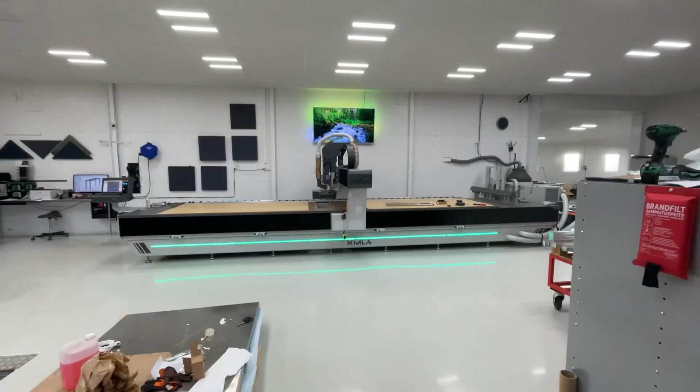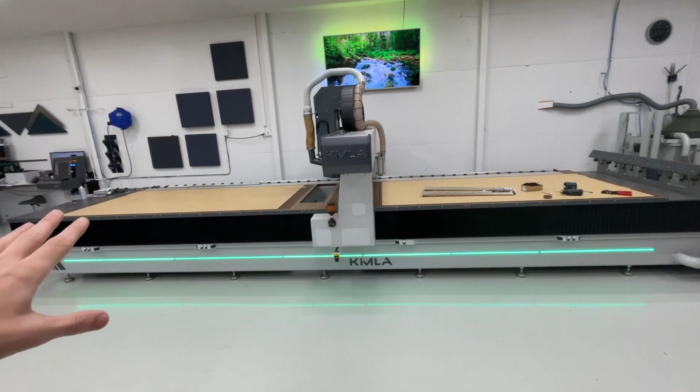Anywho, so it's Saturday, it's my birthday, we're gonna be routing like it's my birthday, because we're gonna produce 260 parts, and I think I can get around 100 from each sheet. I'm not gonna stay here, I'm gonna load it up and let it run while I'm away.

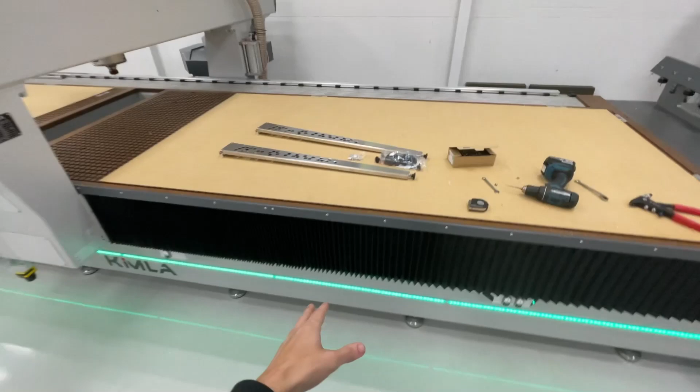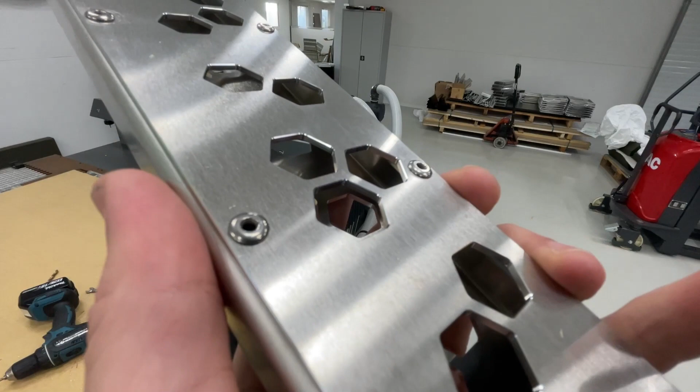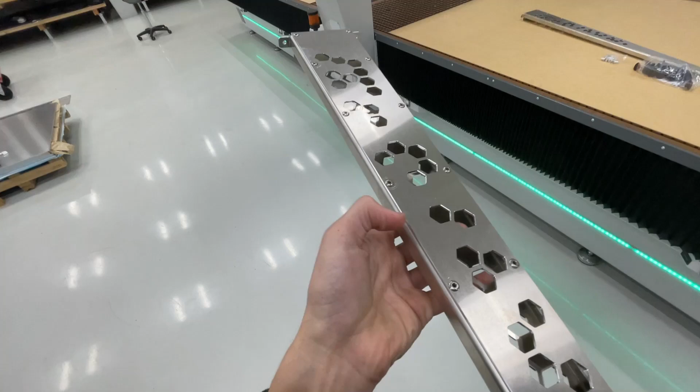I did make legs for the packing table that I still haven't put up. How about them chamfers, huh? Quite small though, I wish I would have made bigger ones. So this is just a flat sheet that is riveted to a bent piece on the rear here. No bending marks, oh my god, that looks so good. And then some adjustable feet. Initially I meant to make the flat part Kimla dark gray and the bent part this bright gray whitish color. I think I just might not even bother and just let them be like this.

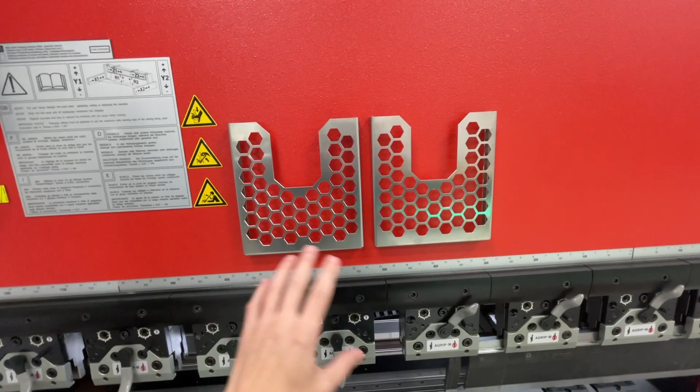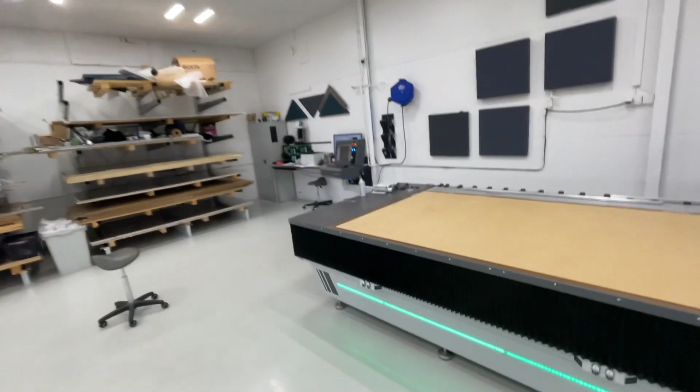Also made these because I figured when I was standing here and flipping my papers, I had nowhere to put them, so they kept piling up like that. So I quickly drew these up in Fusion. Fusion is so simple, it takes me no time at all to design these, so get into Fusion if you're not into Fusion. It's really good for what it is. Same thing here. I have two of those because I kept putting them here, and the machine kept blowing them down onto the floor. Anyway, so here's the design of that table.

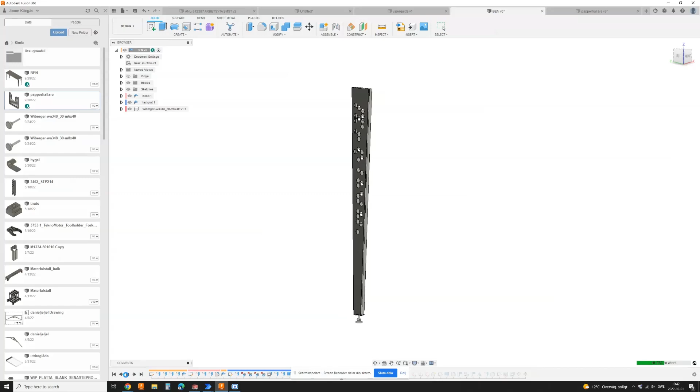Paper holders, same thing.

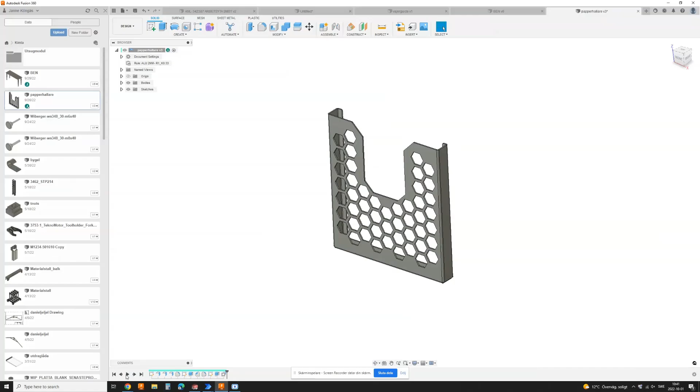My new friend Rogue CNC asked about a video designing, printing and using the dies and stuff for the press brake. I'm probably gonna forget, and I'm too lazy, I think, but I might as well just do a quick video.

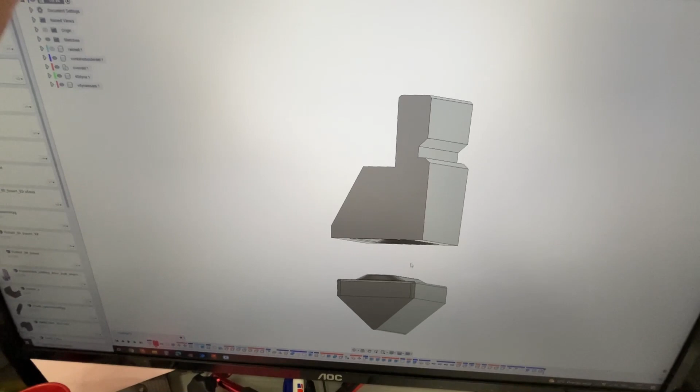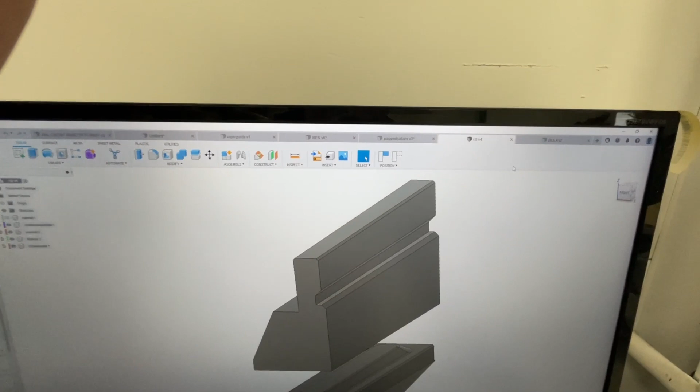This tool is for making this shape into 3mm aluminum. Quite a bit of tonnage on these. It did work. The very edge of this thing warped up a tiny bit while printing, not while pressing, so I should reprint that, but it still worked. Here's the humps.

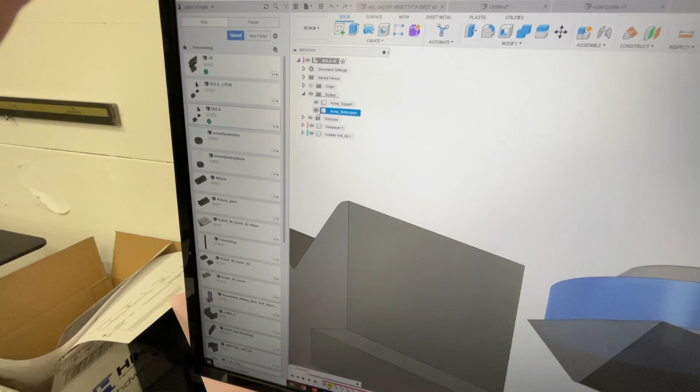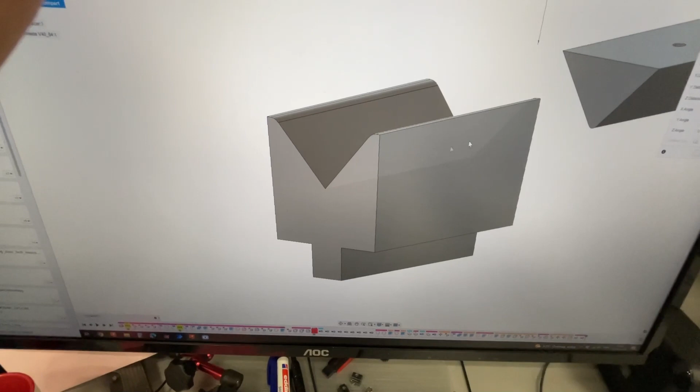That's the top part. The bottom part, this is just an adapter for the V die. Let's go like this and I'll show you quickly. So there's a pinhole there, same thing in the bottom part there, and I just put a pin in it so it won't slide around. This die is Kimla original. It's Amada original, but they don't supply you files, so I had to draw this up based on their drawings. Still works, no problem really.

There is though this page, rolleritools.com. They have a bunch of different dies and tools, and the great thing about this site is if you go into attachments, there's the DXF of this tool. So, two seconds to import that into Fusion, extrude it, print it, and you're off.